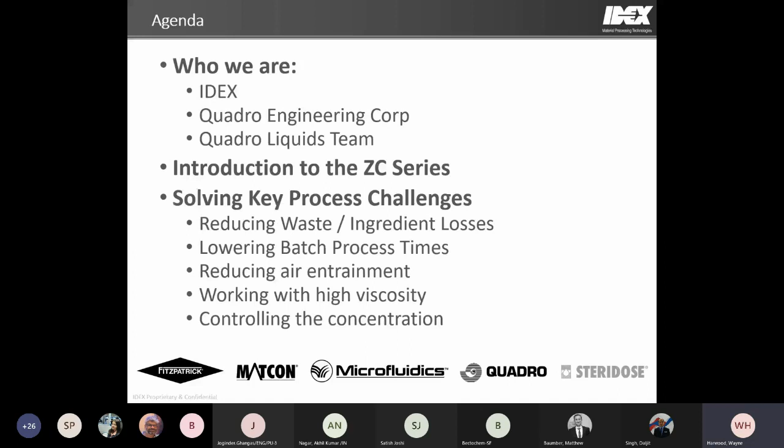So who IDEX is - really it is a global company consisting of a vast network of different individual companies through different industries, all with a goal in mind of helping people with different aspects of life, whether it's process operation to health and science operations, to different dispensing or even life-saving equipment when it comes to some of our fire and safety products as well. Things like the Jaws of Life are part of the IDEX portfolio. So we're quite a proud company in terms of being able to influence people's lives in a positive way.

IDEX consists of many thousand employees - I imagine this is probably approaching closer to 7,000 these days, but I haven't seen that updated figure. But what we focus in on is again that life-saving and impacting of people's lives on a day-to-day basis. Now within the IDEX portfolio, Quadro is part of a group called the Material Processing Technologies Group, and I'll get into that a little bit further in terms of what makes up that group. But really we're looking at specific process handling equipment, both semi-solid, solids, and liquids handling equipment.

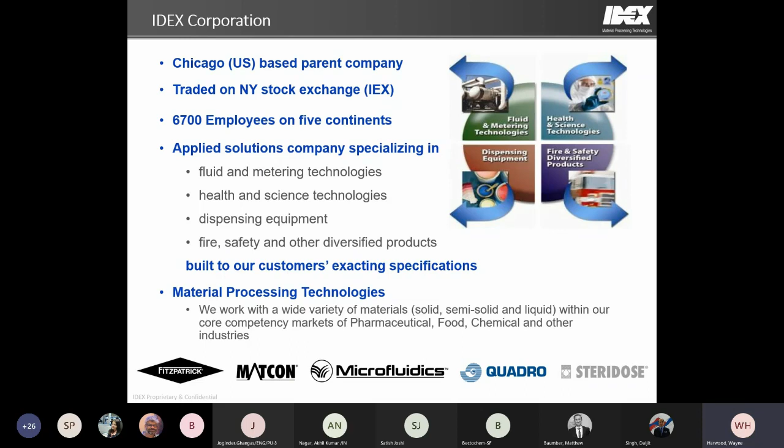So we keep moving along here. Within the MPT group there are actually 5 companies: the Fitzpatrick Group, the Matcon Group, Microfluidics, Quadro, who we're talking about mostly today, and as well as Steridose. So within that group we do a vast, wide array of equipment - everything from compactors to dry mills to powder dispersion, high shear mixing, inline processing, screeners and classifiers, bulk handling equipment. The most recent addition to the group is Steridose, which will do a lot of sanitary mixing and different processing aspects for liquid processing. So lots of similarities between the groups, lots of synergies, and they come together to form that MPT group.

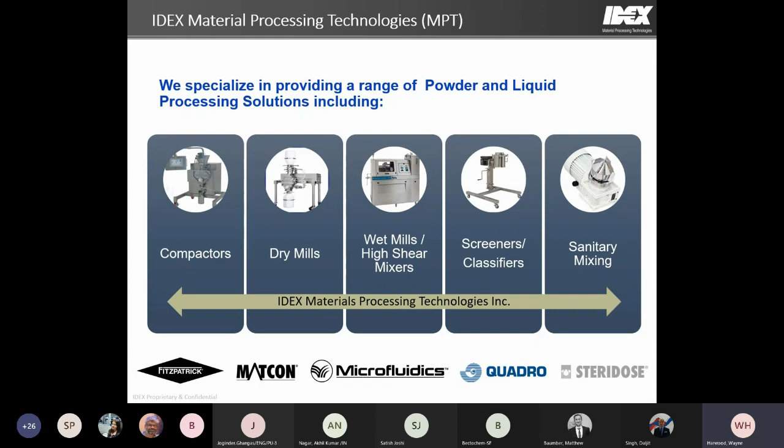So moving on, Quadro itself. Quadro is part of the IDEX group. We're located in Waterloo, Ontario, about an hour outside of Toronto, so really close to a pretty major airport. Quadro itself currently has 170 plus employees.

We have 2 buildings that we occupy here in Waterloo, where we do both our offices and our manufacturing support for a number of the product lines within the MPT group, specifically Quadro Liquids, Fitzpatrick, Microfluidics, and Steridose, as well as the Quadro Solids groups. Quite a lot of manufacturing goes on out of this one facility, and we're quite proud of that.

The business has been operating for over 45 years now, and we operate globally. One of our key objectives is to develop long-term relationships with our customers. That means success for both us and, most importantly, for our customers, because part of IDEX's motto is to impact people's and customers' lives in a positive way on a daily basis.

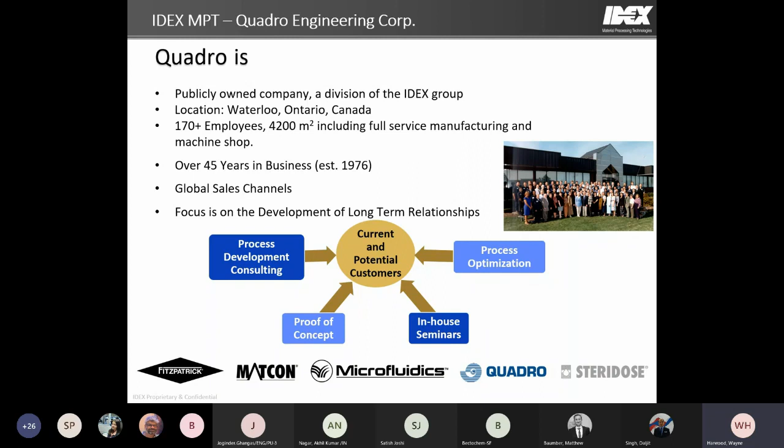Delving a little further into the Quadro Liquids product line before we get into the ZC in particular and where we fit, we really have 4 main pieces of technology. We have an in-tank mixer called our Y Jet, then we have the Quadro ZC, which we're going to spend a fair bit of time talking about today, and then we have 2 pieces of inline emulsifying and wet milling equipment, our Z emulsifier series and our HV emulsifier series.

This graphic shows how we relate on energy scales across the different pieces of technology. Microfluidics, being a sister company, shows up here as well, and they tend to go a bit further than what our inline technology can do, so it's a great synergy there.

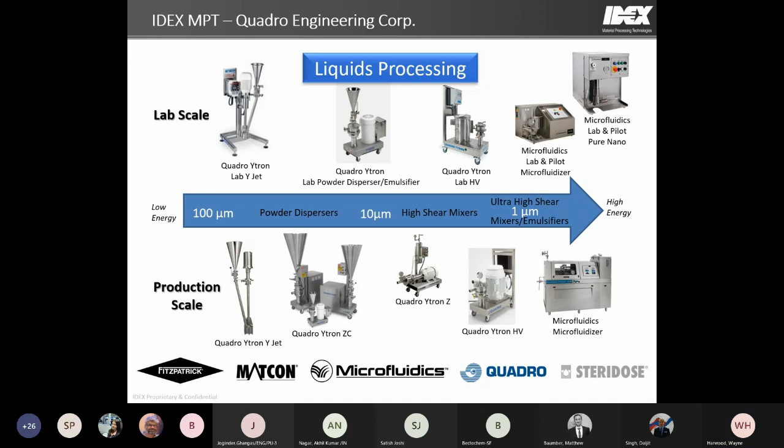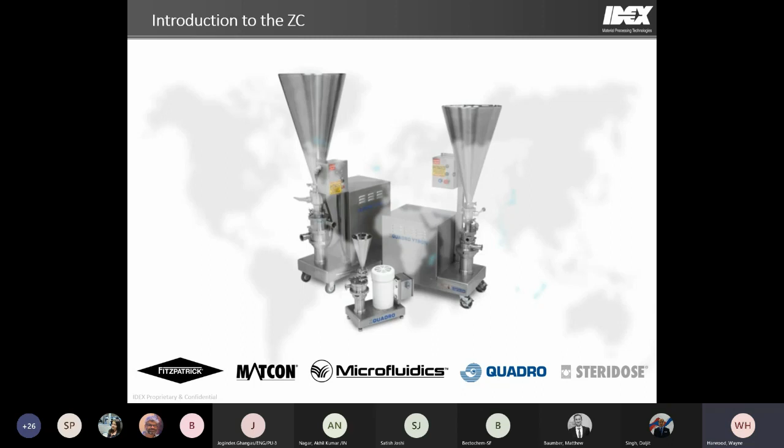So we will move on towards the ZC technology, to give you a quick look at what it is and why we use it, and then we'll delve into where it can help you the most.

The reason why we like to use the ZC is making sure we're picking the right equipment for the right application. The ZC has been designed to work with some of the most difficult to disperse powders, things that want to form lumps, fisheyes and agglomerations, because they want to grab onto the liquid they're being added to so quickly that they'll form those agglomerations. The ZC has been designed in a way that will allow us to eliminate that from ever happening, to give you a much more efficient process.

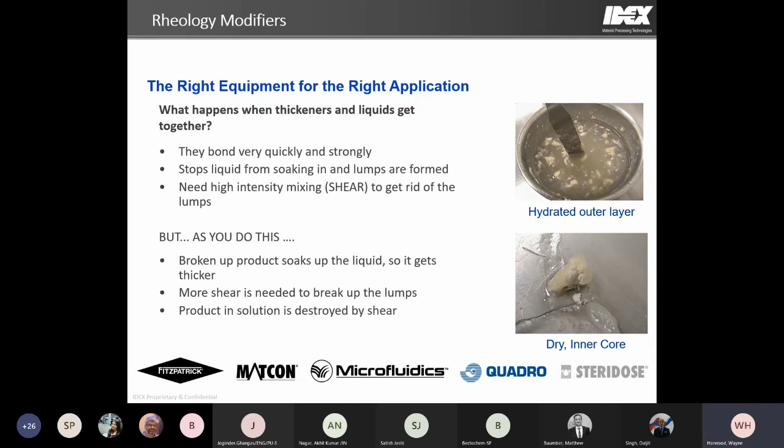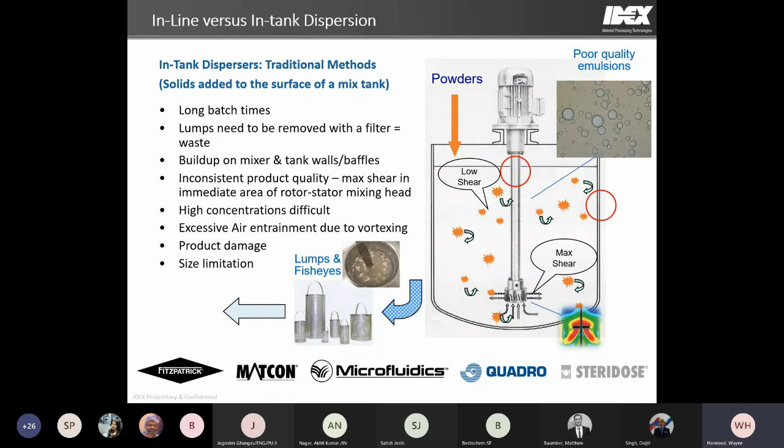When you're dealing with those things, some of the more traditional approaches use an in-tank high shear mixer. There are many reasons why that doesn't necessarily work to the same level as approaching it inline, and we're going to get into those. One of the main reasons why in-tank is going to struggle relative to inline is because we've already formed those agglomerations and fisheyes.

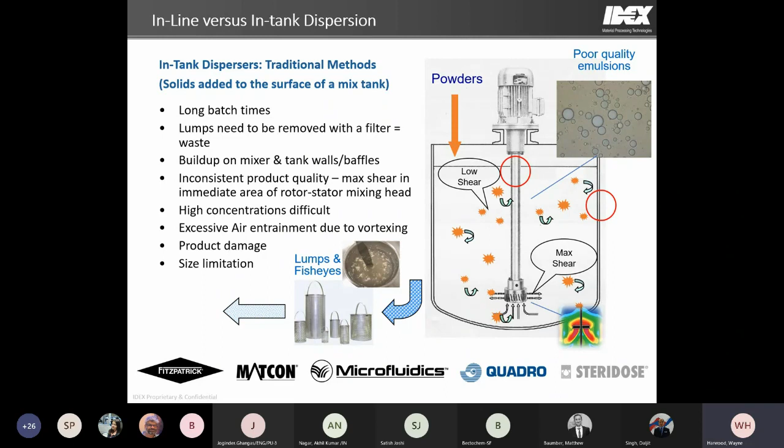There are many problems that go along with having formed those before we want to, and trying to eliminate them after they've been formed can be much more challenging. So we're going to focus on the reasons why that happens. This graphic in the bottom right shows what your shear profile looks like inside the tank. You get a very wide range of shear concentrated around that high shear mixer, and you have to get everything down to that point to make it efficient. That's where your inefficiency will typically arise with an in-tank method.

So where's the ZC used? This is a really broad spectrum of applications. Not everything here is going to apply to the pharmaceutical industry, but I want to give everyone a broad sense of places and products this could potentially be used in. When it comes to pharma, we're going to see everything from creams and lotions, cough syrups, and different granulation type products as well.

Those are all applicable, but we're not limited to those applications either. Really where we want to focus is if you have a difficult to disperse powder, whether it's a rheology modifier or even an API or another additive that does not want to add in, dissolve, or blend in with the liquid phase you're adding it to, there's a really good chance the ZC is going to help for the variety of reasons we're talking about today.

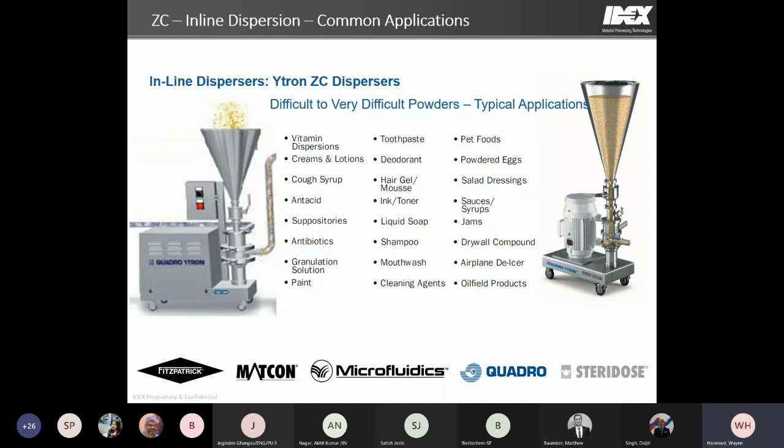So in this slide, we're going to take a quick look at what's actually happening inside the unit, and what goes into the design to make it effective for those difficult to disperse powders.

As you're feeding your liquid in through the inlet port on the right-hand side, the liquid is actually shielded from the incoming powder. That liquid is being fed at a consistent rate, and the disperser has a rotor with an impeller or a centrifugal type pumping vane, interspersed with the teeth of the rotor and the stator.

That impeller wants to pump away the liquid faster than what we're feeding it. The differential created by the disperser creates a vacuum, which draws your powder into the process, keeping it separate from the liquid right up until the point of mixing just above the high shear element.

At that point, the liquid and powder meet, and the powder is separated into individual particles, so those lumps and agglomerations don't get a chance to form. We end up with a really high quality dispersion in a single pass. It's quite effective.

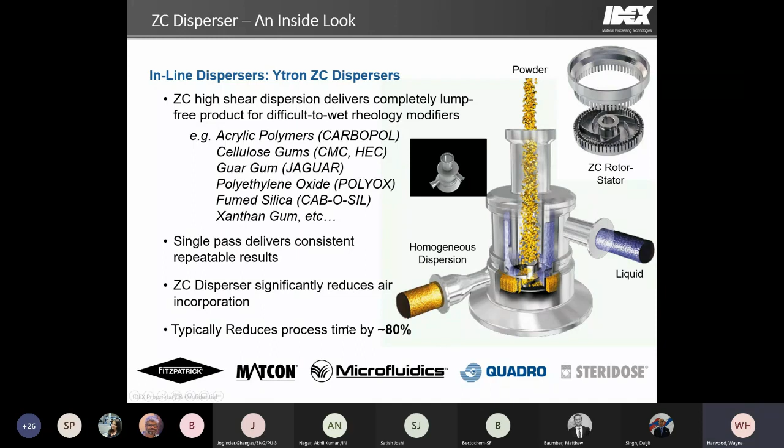Within the ZC, there are actually 4 different sizes of units. Everything from pilot scale, which is our ZC powder disperser, or ZC0, typically a 3 horsepower motor, operating in the 3 to 12 gallon per minute range, or about 11 to 45 liters per minute. This unit is typically meant for pilot scale, but with many industries, that pilot scale can often be equivalent to more of your production scale.

We do see that a fair bit in the pharmaceutical industry because you're often dealing with much smaller batch sizes. So we will see the ZC0 used in production, but more commonly when we talk production, we're looking at our ZC1 or ZC3. Those are the most common units, being a 7.5 horsepower motor. You can see the ranges of flow for the ZC1, and the ZC3 going up a little further. Typically the ZC3 operates at about 3 times the rates of the ZC1.

Pretty simple. Our final scale of operation is the ZC5. Generally this is a very large unit, and I would say uncommonly used, especially in the pharmaceutical industry, so we won't spend a ton of time on it. But for comparison's sake, this might be used to unload something like a silo of powder into a liquid stream. It's going quite quickly, with rates of incorporation approaching 1,000 pounds per minute.

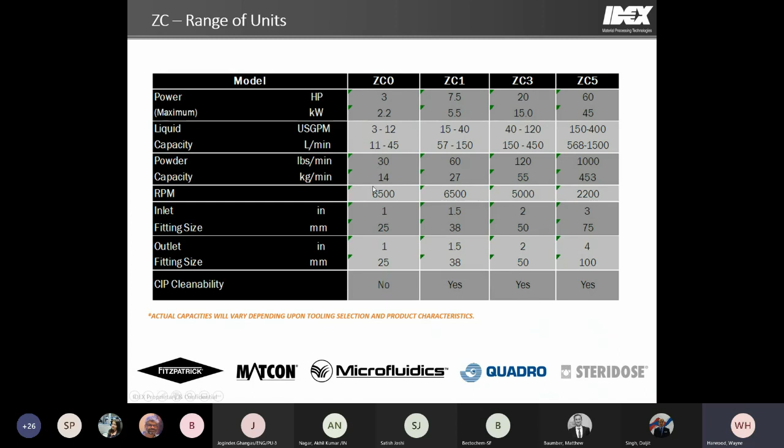One of the ways we primarily size the unit is actually based on that powder capacity and how fast you want to incorporate your powder into the liquid, as opposed to a specific flow rate you want to run, because we can change the rates a bit by changing the sizing of the tooling we have installed. We want to provide the customer with the best option, so we'll look at how quickly that powder needs to come in to meet your process needs.

There's a couple extensions to the individual models that we can include on all the sizes here. The Kontinuum or CDS system is our approach to controlled concentrations, and we'll talk more about that as we go. If we're looking at delivering exact concentrations of materials, or just a general system that allows you to deliver a controlled concentration over time, we can do that. We can do just the individual unit, or we can do a fully skidded system like you see here in the photo.

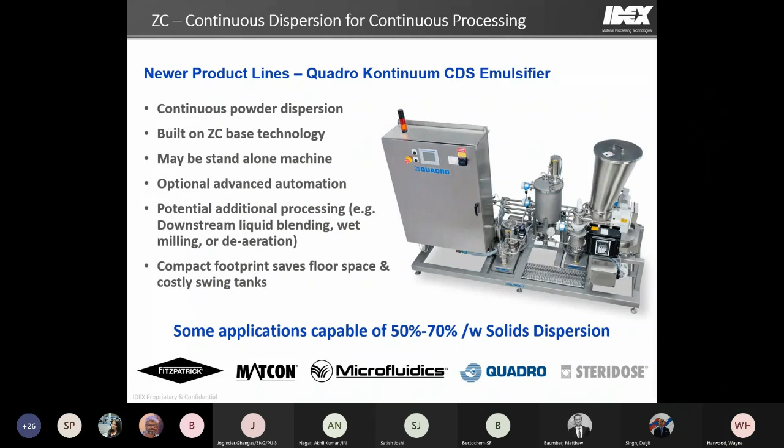Beyond that, we've also developed an ergonomically friendly design for the ZC0, the ZC1, and the ZC3. Again, those are the units that are most common, where you could actually have an operator theoretically keep up by hand feeding the powder. We simply couldn't do it for the ZC5, because hand feeding 1,000 pounds per minute just doesn't make sense. So this gives your operator a working height of about 42 inches typically, so that they can stage bags right at the top of the hopper and just keep pushing material into the unit at a pretty steady flow.

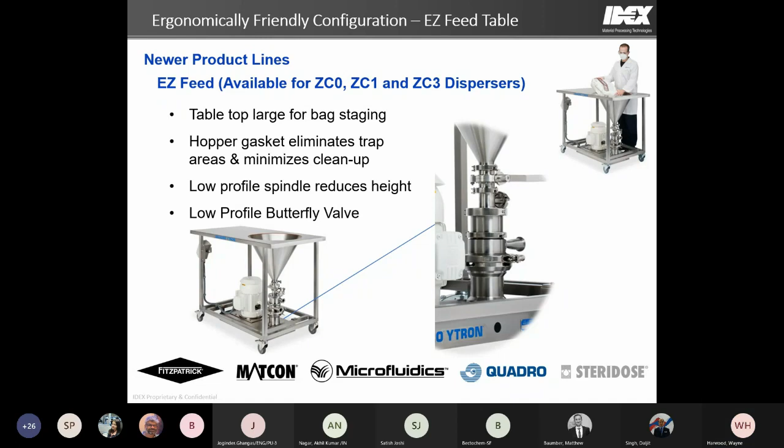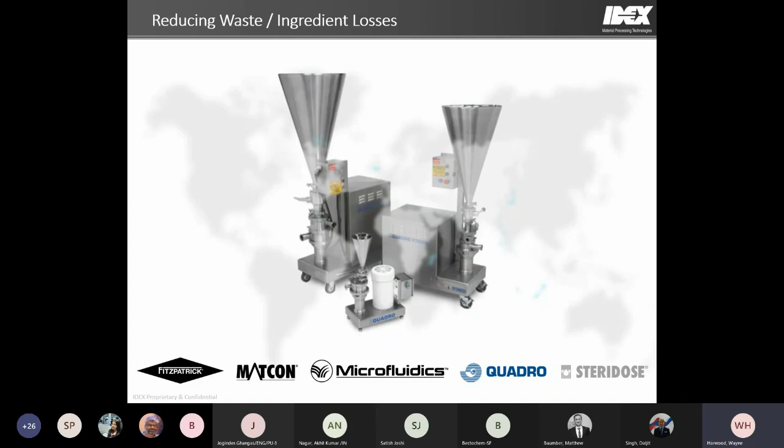All right, so the first topic we're going to jump into in terms of the ways that the ZC technology can help you is going to be around reducing waste and ingredient losses. I think we can probably guess how that happens, but we'll go over what's really happening here.

So this comes back to where we started a little bit. When you get those agglomerations and fisheyes, it's typically because the powder you're working with is very hydrophilic and wants to grab onto the water or the material you're adding it to, so it actually forms a casing around the powder with dry powder inside. For those of you that aren't familiar, that's what we would typically coin as a fisheye. When you form those, they're very difficult to get rid of. Oftentimes in processes, they need to be filtered out because it simply doesn't make sense to spend the energy, or sometimes you don't have a way to actually break them down effectively to their fully dispersed state. So many operations will actually filter these out, which is throwing good material away.

So if we use the ZC to make that solution right in the first place, oftentimes customers will be able to reduce the amount of material that they're adding, first off, because they're no longer throwing materials away. Second, they can actually eliminate that filtering step from their process, which simplifies things overall and simplifies the cost of the overall application as well. So a couple different benefits that we can focus in on.

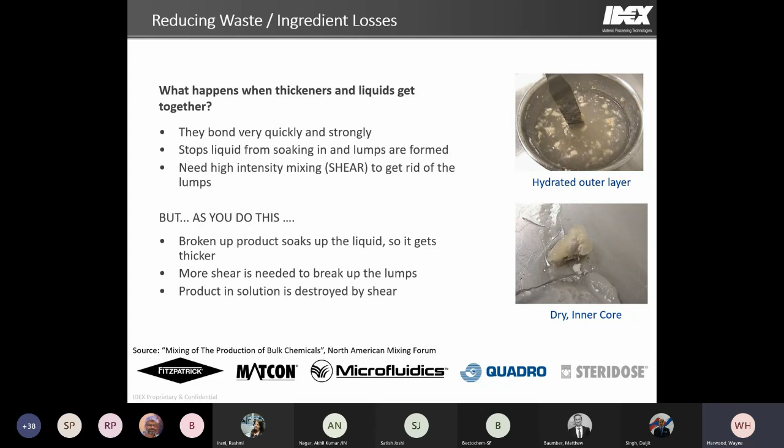When you do this in tank, the other thing that happens when you're actually trying to break apart those fisheyes or agglomerations is that you can actually over-shear some of the product. Now, certain products, maybe things like a polymer, like a Carbopol or another type of material along those lines, can be shear sensitive. And if you spend a ton of time mixing high shear in tank after some of the material's already begun hydrating, you can actually start to over shear that and break down the molecular structure of the gel, actually losing the viscosity that you were using this material to try to build. And when we do that, obviously you're going to end up using more material than you want. So doing that dispersion right the first time with the ZC technology can help us eliminate that over shearing and eliminate ingredient losses, again allowing you to use less of the material that is usually quite expensive.

The other thing we often see with an in-tank approach is buildup on those walls or on the mixer shaft itself. Again, when we do this in line, you're going to eliminate that, which can allow you to reduce the amount of material and still have the same final viscosity build that you see.

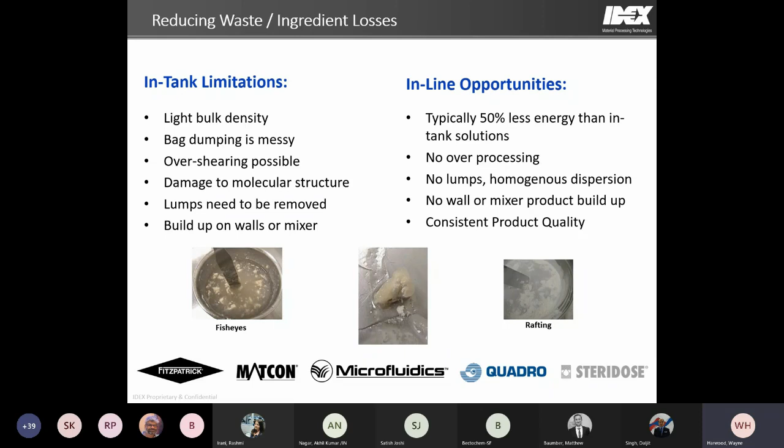So we have a couple examples of doing this. This particular one was for a testosterone gel, where we were dispersing Carbopol into water. Previously they were using a different inline technology, an older technology called the tri-blender. Many folks will actually look at the ZC and consider it just a tri-blender. But it's not. It's really the next evolution of that inline technology, taking what the tri-blender used to do and doing it at a much more efficient rate.

With that tri-blender, they were over processing the materials because they would have to continually recirculate to get everything in. That Carbopol, as many of you may know, is quite difficult to disperse, and if we're able to do that dispersion right the first time, we can eliminate all that buildup and filtering of product.

In this particular customer's case, based on ingredient losses and the batch time cycle, they projected to save almost $300,000 a year. Most of that coming from the batch times. Now, we can see the ingredient losses were a contributing factor too. Per year, they were throwing away almost $10,000 of material just because of that buildup and waste. So $10,000 per year, using even just a small portion less material than what you used to, will certainly add up quite consistently over time.

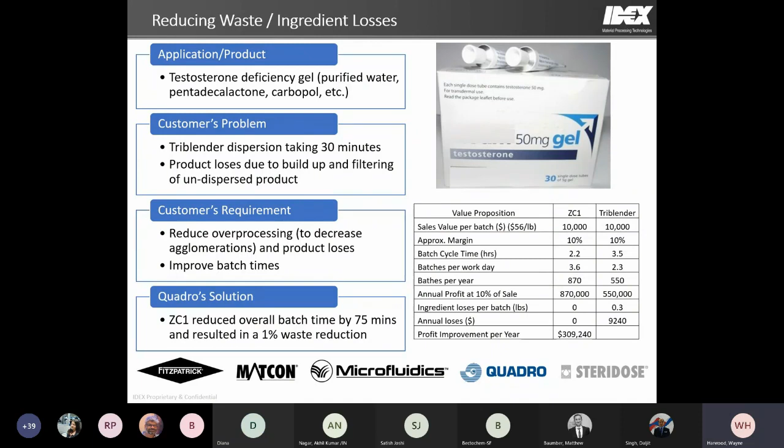Another example here, again different Carbopol, antibiotic cream. This one we were looking strictly at ingredient savings, shown in the chart on the bottom, but we were able to reduce the overall waste by approximately 2%. Again, by eliminating those agglomerations, doing this right in a single pass.

This was in comparison to an in-tank mixer, as opposed to a different type of inline mixer. And so we see the reduction in waste was double what we were able to achieve in the previous example.

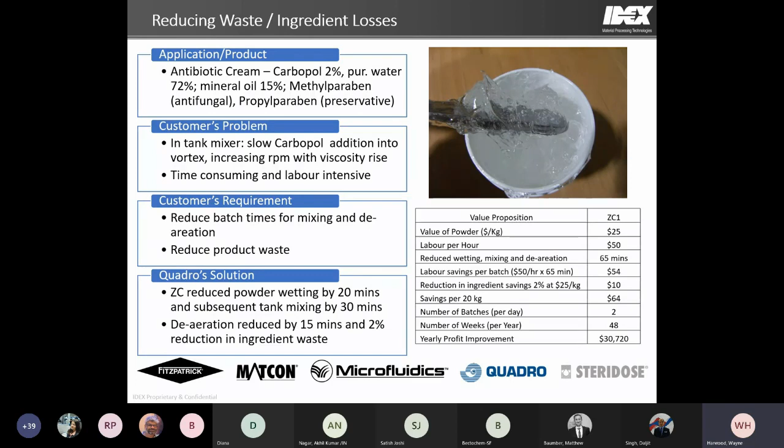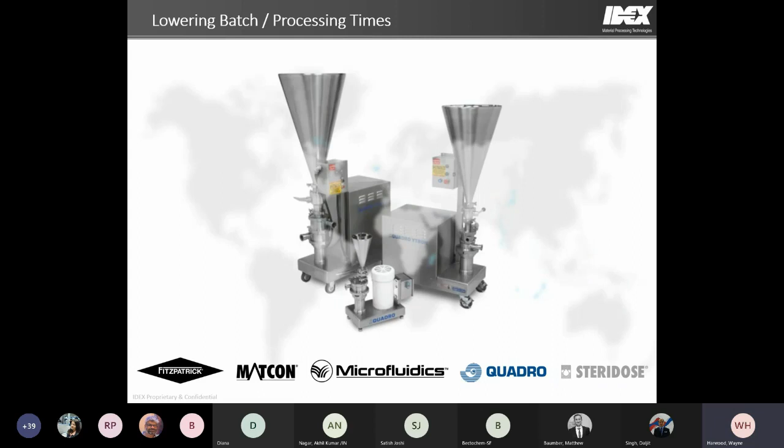Moving along here, the next application or process advantage we can look at using the ZC is lowering batch times. We saw a little bit of that in the first example. The reasoning why, though, there's a couple ways we can approach this relative to in-tank technologies versus inline.

If we look at this relative to in-tank technologies, and we do a good dispersion in a single pass using the ZC powder disperser, there's a couple things that happen. We can typically reduce the amount of air that gets added, which means you have to spend less time deaerating a material after the fact. Also, the time to hydrate some of these difficult materials can translate to about an 80 to 90% reduction in batch time relative to some of those in-tank methods, just because we're doing that dispersion right. You don't have those agglomerations that need to hydrate or be broken down after the fact.

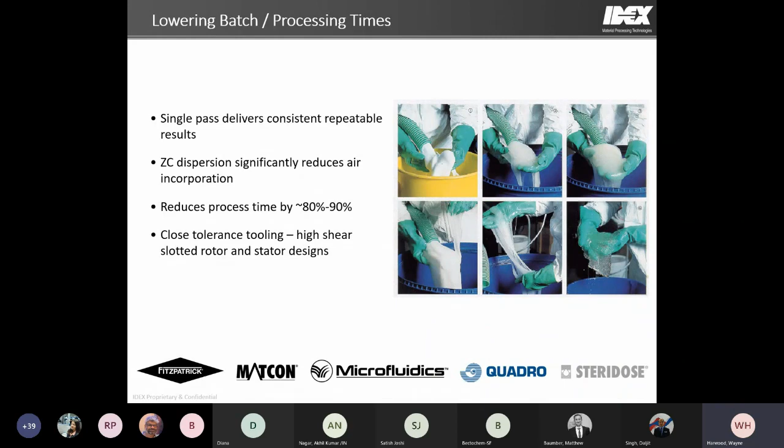So this is kind of the most common setup of the ZC, or actually the most efficient, I would say, but probably not necessarily the most common. In the pharmaceutical industry, a lot of times you'll have regulated batches with set amounts of ingredients, and we'll see that on the next slide.

But this being probably the most efficient setup, you can have a controlled liquid feed coming into the unit, you load your powders up into the hopper, and as that liquid material is being fed to the tank, it goes through the ZC, draws your powders in, goes to your tank, and you finish off any mixing or other minor additions of liquids going on to the batch. The reason it's most effective is typically because you have that virgin liquid coming into the unit, always at its base viscosity. It's going to be most effective at creating a vacuum to draw the powder in. So it's not the only way we can operate the ZC, but it does tend to be the most effective way.

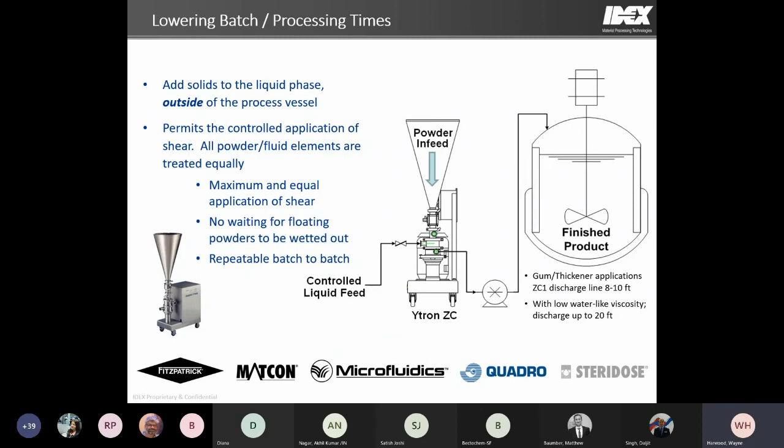The next most common is our recirculating setup. So we've got our liquids loaded into the tank already. We're going to recirculate that liquid through the system, drawing the powder in, and then recirculating back to the top of the tank.

Now, sometimes if your product or your powder that you're adding, or even the base liquid, is a high viscosity to begin with, we're going to need a couple things here in the system to make the ZC work, and that typically is a positive displacement pump. If the liquid is staying thin, you can actually do this in recirculation without the need for a secondary pump. But as that product viscosity goes up over usually about 500 CP, then we're going to need to put that pump on the discharge of the unit so that we can pull away, much like we talked about earlier, how the disperser wants to pump away faster than the feed to the unit.

As that viscosity climbs, we lose that effect. So we need that pump to pull the material away so we still continue to create that differential and draw the powder in at a consistent rate. So there's a couple different variations of this, is the key point I wanted to make. Some use a pump, some will not.

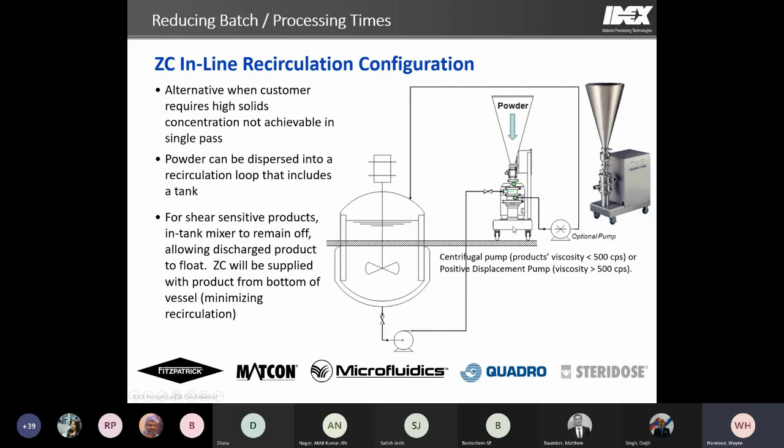The next key process advantage to the ZC is going to be in reducing the air entrainment.

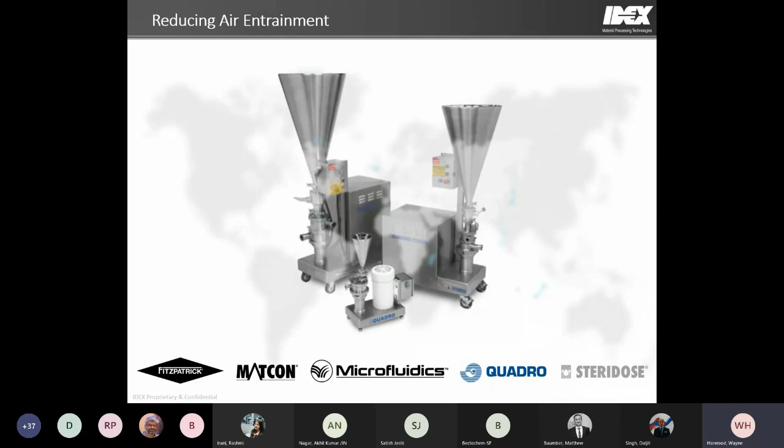There's going to be a couple ways we'll highlight here that happens. Really what it ties back to is one of the key points here when we compare it to an in-tank method. In order to actually shear those agglomerations and get that powder well blended into the liquid with an in-tank method, you often need to create a vortex to draw the powder down to the high shear zone. As we mentioned, it's concentrated around that mixing impeller inside of the tank. So you need to get that material drawn down, and you do that through vortexing. And when you're vortexing, you are constantly sucking air down as well. And that air hits the high shear and will get dispersed into the liquid as well.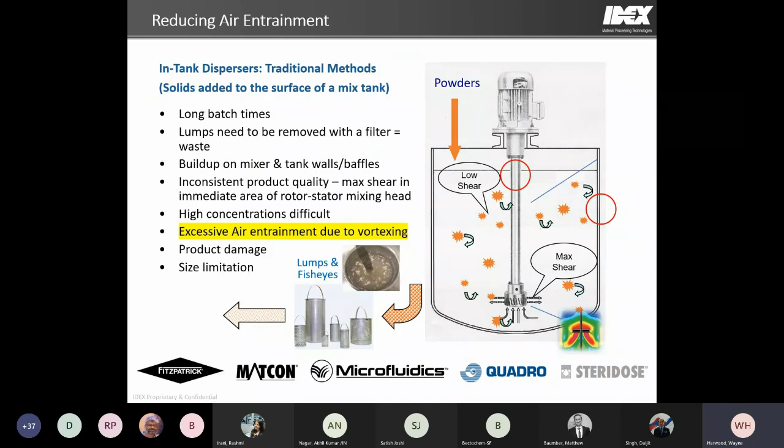So this method can actually give you quite a bit of air entrainment. And when we use the ZC, there are a couple ways that we can help eliminate that. The first, and most effective we've found, is our controlled concentration system. The reason being is we can actually regulate how much the ZC is trying to pump away. We limit it to the point of being just about equal to the combined volume of the liquid and the incoming powder, so that means we have very, very little air being added to the liquid at the same time.

This particular example here was a system set up for a coating solution where we're dispersing a blend of gum and pigment. The goal was to create a continuous flow of the tablet coating solution with less than 2% air entrained in the product, because anything more than that would have caused issues when it gets to the spray coating system down the line.

So we actually did some benchmark testing when we put this system together. We did a vortexing in-tank system with a high shear mixer down at the bottom to see, if you sprinkle feed that powder in, how much air entrainment you'd get by creating that batch. We ended up typically with about 80% liquid, 20% air relative. We had a density of about 0.8 relative to 1.0, which was our target.

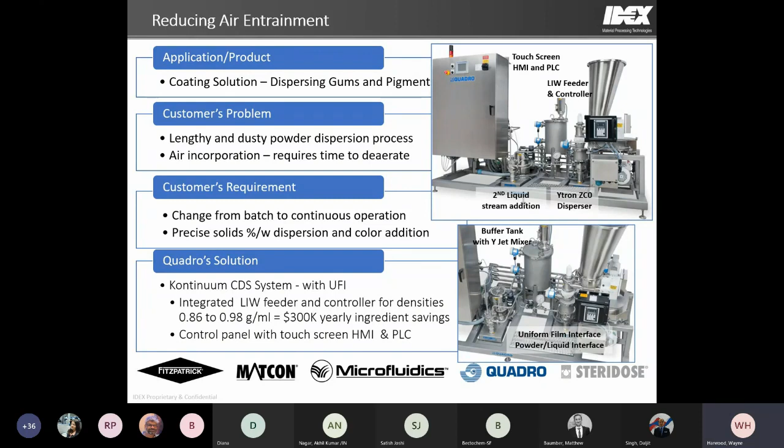Okay, so the next topic is working with high viscosity. If we're talking rheology modifiers, that is what we're looking to achieve: a dispersion of the material that has a lot of viscosity, so that you can hold up your active in suspension, hold pigments in suspension, whatever it may be. Oftentimes those materials are going to have that viscosity to it.

There's a good list here of some of the samples and where they might be used in the pharmaceutical industry. Suspensions are obviously one of the top applications listed, but we don't stop there. This is a high-level list, but by no means the full list of things the ZC could be utilized for, or the different products. Just a small sample of things we've had exposure to over the years.

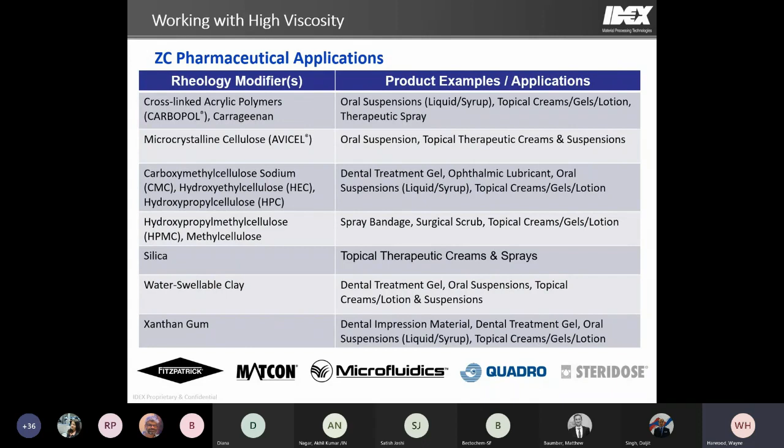I started to touch on this a bit earlier, but the way we do that is going to be with the recirculating system typically. So when you're dispersing into a really high viscosity product, you have to have that dual PD pump system. That first PD pump here, we say centrifugal in this graphic. When you're high viscosity, that feed pump has to become a positive displacement pump so that you can push the material to the unit. And then your discharge pump has to then be a positive displacement pump as well. It's ideal to have these partnered very closely, in particular the positive displacement pump paired very closely to the discharge. It certainly doesn't hurt to have the centrifugal or feed pump close to the ZC as well.

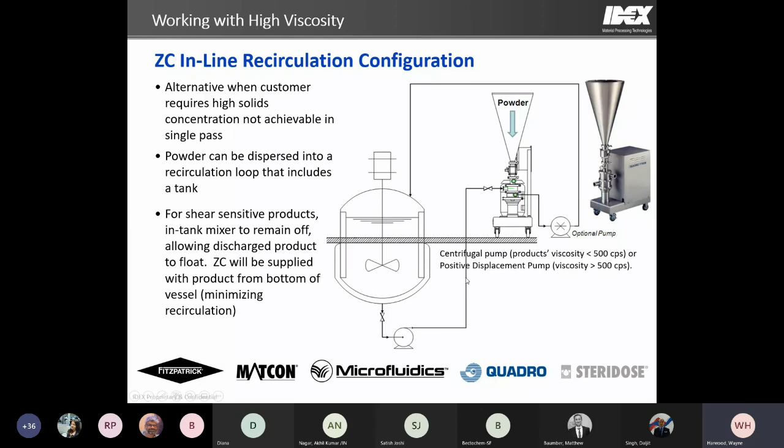Now a couple examples of this in action. We were actually working with a silica addition in this case, where many of you might know silica is a very light powder, but we were going into a very thick base to begin with to add in. The silica is often used in something like a toothpaste or a different type of thick cream, and that base is often already very high viscosity. So trying to mix a high viscosity liquid and a low density, very light powder can be quite challenging to do. But the ZC does it very effectively.

And because of that high viscosity liquid, we need that positive displacement pump on the infeed, positive displacement on the discharge. In this case, because fumed silica was so light, the customer also would like to keep from dumping that material directly into the tank, because it's so light it could go everywhere. So we paired with them - they would put a powder pump in place to transfer the powder directly into the hopper. We have the hopper sealed off here so the powder can't go everywhere. And that allows us to circulate that liquid until all of your powder has been dispersed.

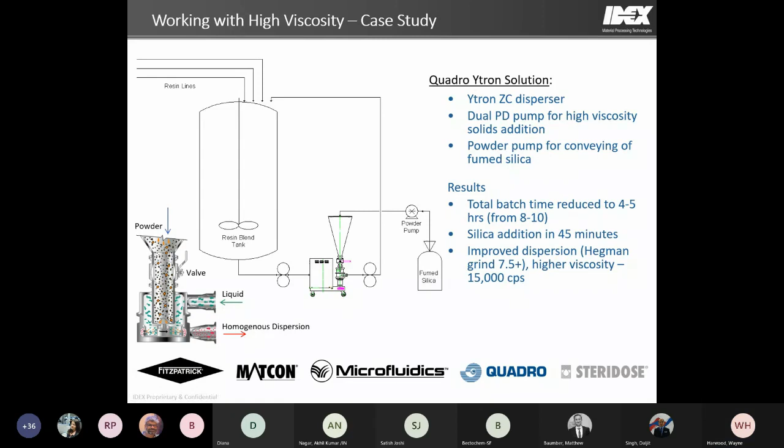Another example, a skin cream additive. The base was again very high viscosity. We've got a system here that allows the customer to recirculate in the main mixing kettle and then transfer all that material over to the next system basically here. But again, we're using that dual PD pump system with the pumps very close together, and able to - you can see the inlet comes up here, the discharge is actually coming off the back and then returning back to this tank here.

We were trying to actually disperse the active ingredient in this case into an oil and water emulsion base. And that water and oil emulsion was already very high viscosity. In order to do that, we needed to have that dual PD pump setup in place and able to recirculate around. One of the key benefits to the dual pump setup is if you have a product viscosity that is constantly changing as your material is being added - because the viscosity is continually changing, that dual PD pump configuration can actually help us keep the rate of incorporation of the powder fairly consistent. And that is obviously a benefit too, because it allows you to plan your batches much more effectively.

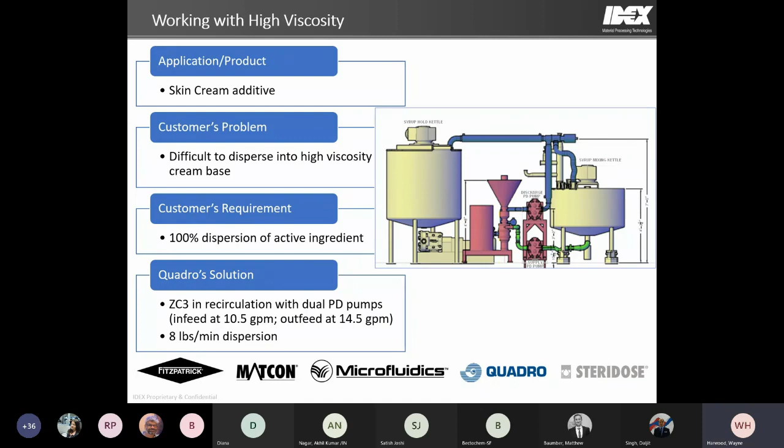Okay, the final point we're going to talk about is controlling the concentration. I think we touched on it a little bit with some of the others. There are two approaches to doing this.

The first is our conventional hopper feed method. When we're sending the liquid to the unit, we've got a specific set of tooling picked inside of that unit that will help us define how quickly that powder is drawn in. But if we want to further refine how quickly that powder is coming in, aka decrease the rate of powder incorporation, usually because the thickener or rheology modifier is rapidly hydrating or creating a lot of viscosity quite quickly, we're going to want to regulate that feed of powder coming in.

The way we actually do that is by adding some back pressure to the discharge side here. That can be accomplished with a pump, with a valve and a pressure gauge, or sometimes even just simply by the natural line pressure of the return line to the tank. What that does is give us a measurable and repeatable variable to regulate so that we can tune to a relatively specific concentration.

This approach is consistent. It has its limitations though. We can typically tune for many of the rheology modifiers, but we can only take it so far with back pressure. So we might be able to go down to certain things, maybe 2 to 3%.

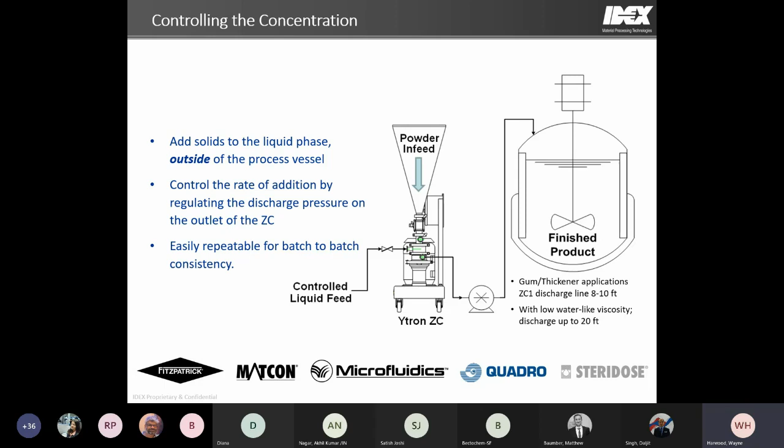If we need to go lower than that in a single pass, we will often need to apply the UFI, or the continuous system that we've already talked about a couple times. With this method, we are no longer relying on vacuum to draw the powder into the solution. We are using a controlled feed of the powder and a controlled feed of the liquid, and we're going to bring them together in a fashion that they reach the high shear zone without being overly wetted. No agglomerations have formed, but the flows of the two streams are independent of each other.

And so that allows us to hit very, very low concentrations, which can be helpful with some powders, but it also allows us to hit very, very high concentrations that we couldn't otherwise do in a single pass. Things upwards of 50, sometimes even 70% in some applications by weight of a solid in a single pass delivered to that next step of the tank.

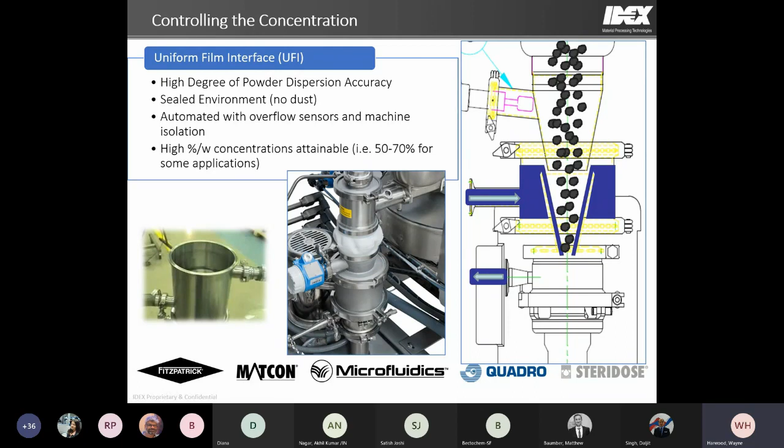A couple of samples of that. We did an SLS solution for this—if I remember correctly, this was for a gel prep. It was going to be a base fluid for a specific gel. They were looking at a 45% concentration, and the ideal was a single pass.

Now, we did approach this initially. We tried it with our conventional method. I think the highest we were able to get in that kind of setup was more about a 20% solution in a single pass. In this case, we were able to achieve a 45% concentration. The gel time was approximately a little more than an hour, with minimal aeration time as well.

We did not spend a ton of time in this particular trial trying to eliminate the air, but the way we can do that, as we mentioned, is by applying back pressure to the discharge side of the disperser to limit the rate that it wants to pump away. By doing that, we could have regulated this concentration and the air incorporation a little bit. Overall, this gave us a way to more than double what we could do in a single pass at an exact concentration in a repeatable method.

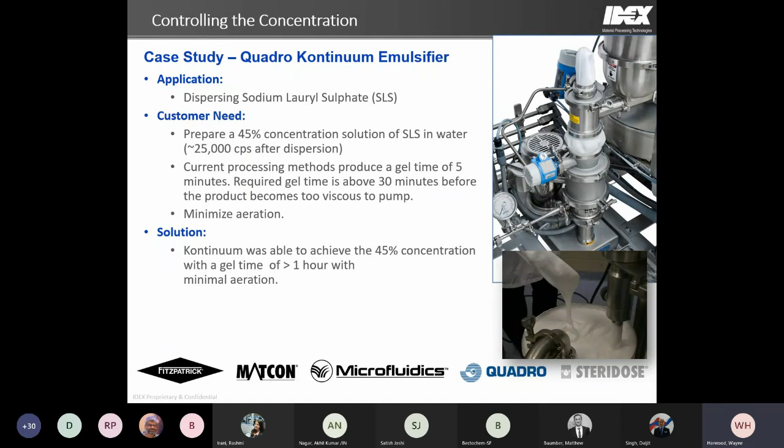Again, this gives us a way to completely slash batch times. It also gives you a way to run consistently, even in a 24/7 application, without any plugging, buildup, or blockages in that powder and liquid interface area. We can continuously run this type of setup without interruption.